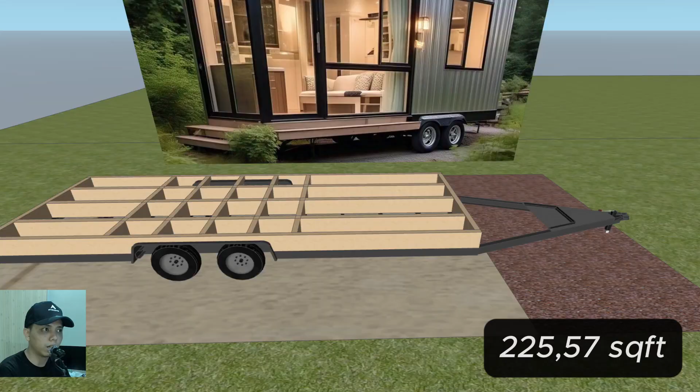Building a sustainable tiny home on wheels requires careful planning, material selection, and design consideration. Here are some brilliant tips to help you build a sustainable 225.57 square feet tiny home on wheels.

The first aspect is about materials and design. The first point is to use reclaimed or recycled materials. Incorporate reclaimed wood, recycled metal, and repurposed materials to reduce waste.

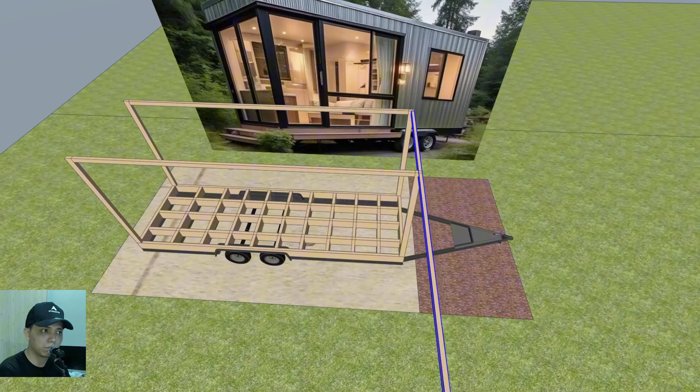The second point is to choose sustainable insulation. Opt for eco-friendly insulation materials like wool, recycled denim, or spray foam.

The third point is to select low VOC paints and finishes. Use low volatile organic compound paints and finishes to improve indoor air quality.

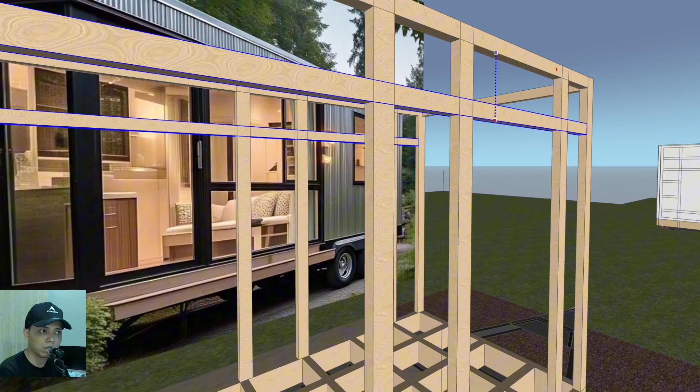The fourth point is to design for natural light. You have to maximize natural light with large windows, skylights, and clerestory windows.

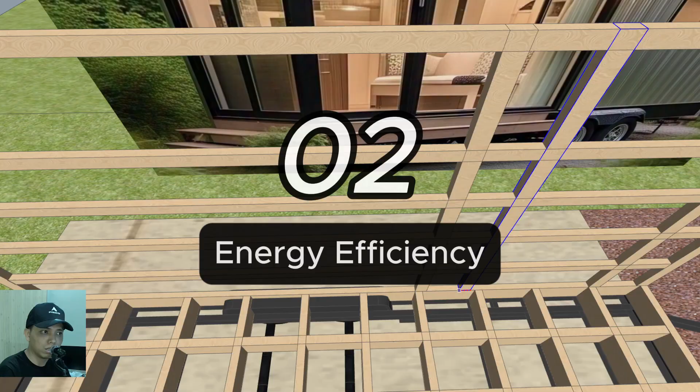Next is the energy efficiency aspect. The first point is about solar power. You have to install solar panels to generate electricity and reduce reliance on the grid.

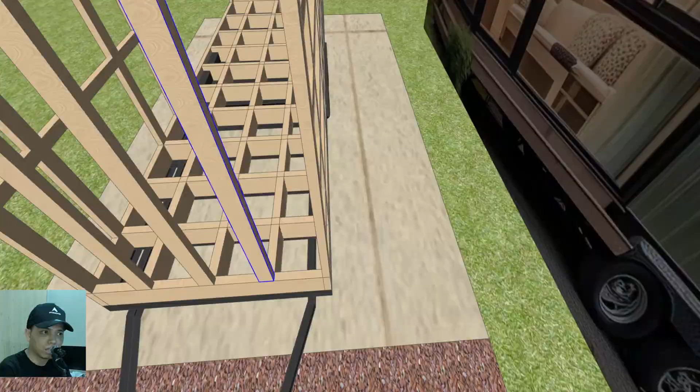The second point about energy efficiency is energy efficient appliances. Choose energy efficient appliances such as LED lighting to minimize energy consumption.

The third point is to insulate and seal. Ensure proper insulation and sealing to prevent heat loss and reduce energy bills.

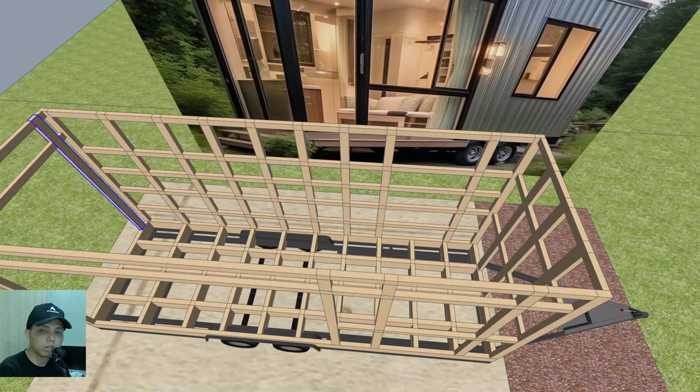The fourth point is about rainwater harvesting. Install a rainwater harvesting system to collect and store rainwater for non-potable uses.

For the water conservation aspect, there are three points. The first is low flow fixtures. Install low flow shower heads, toilets, and sinks to conserve water.

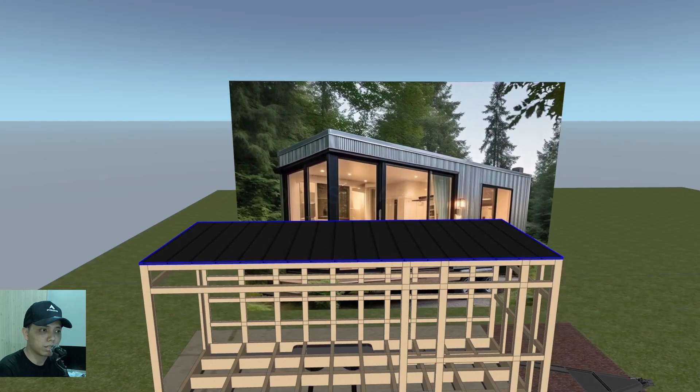The second point is about a gray water system. You have to implement a gray water system to reuse water from sinks, showers, and washing machines.

The third point is about a composting toilet. Consider a composting toilet to reduce water consumption and produce nutrient-rich compost.

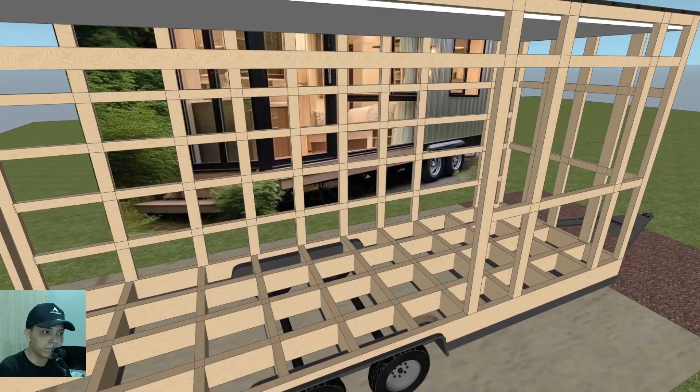For the waste management aspect, there are three points. The first is composting. Implement a composting system to manage food waste and reduce landfill waste.

The second point is recycling. Incorporate recycling bins and participate in local recycling programs.

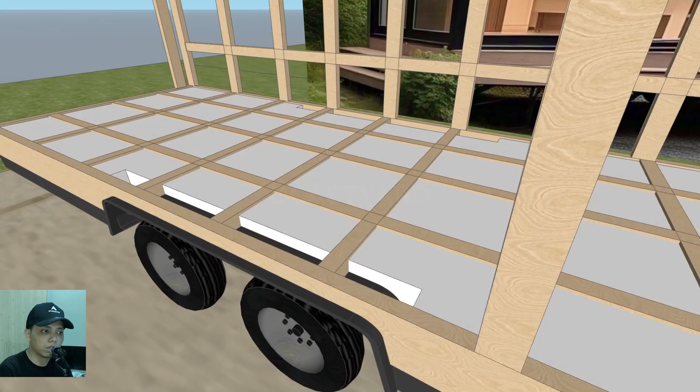The third point is to minimize waste. Design your tiny home to minimize waste generation by using materials and products with minimal packaging.

There are also three additional tips. The first is to use locally sourced materials. Choose materials sourced locally to reduce transportation emissions.

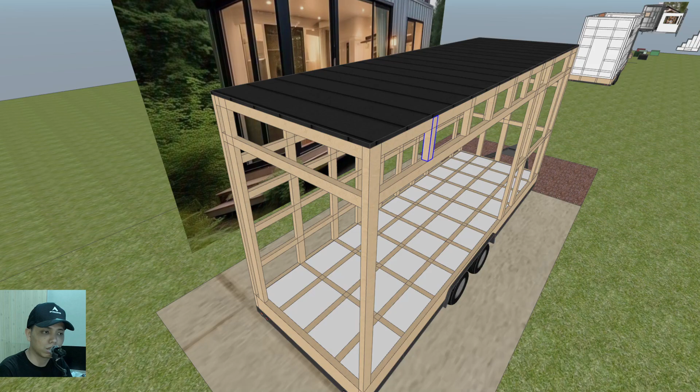The second additional tip is to incorporate plants. Add plants and greenery to improve air quality, reduce stress, and enhance aesthetics.

The third point is to monitor and adjust. Continuously monitor your energy and water consumption, making adjustments as needed to optimize sustainability.

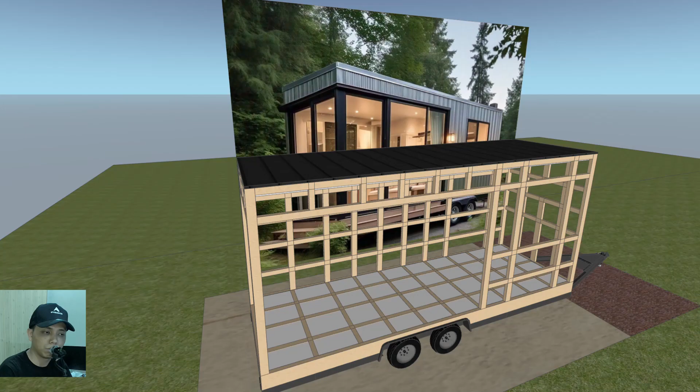For the budget breakdown, it includes materials, labor, solar panels, rainwater harvesting, and gray water systems. Materials account for around 50 to 60% of the total budget, and labor is around 20 to 30% of the total budget.

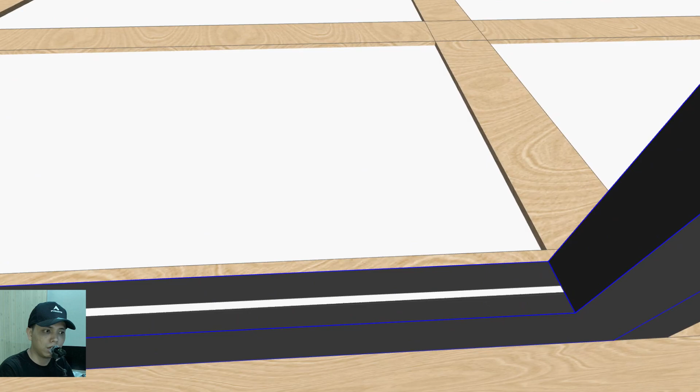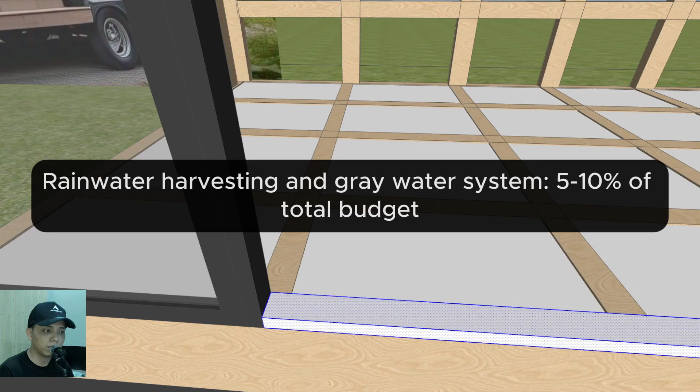Solar panels and energy efficient appliances make up around 10 to 20% of the total budget, while rainwater harvesting and gray water systems account for around 5 to 10% of the total budget.

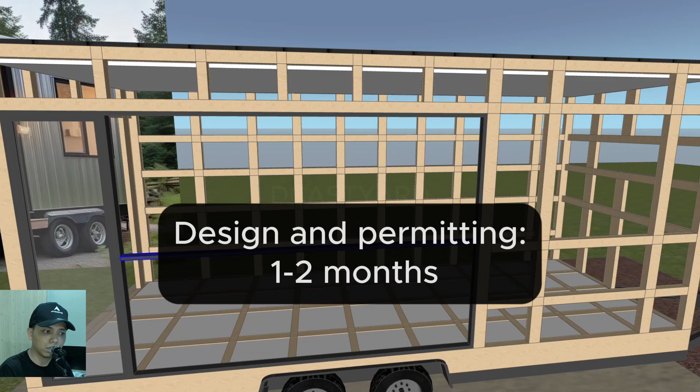For the timeline, it includes research and planning, which takes 2 to 3 months, design and permitting, which takes around 1 to 2 months, construction, which takes 6 to 9 months, and completion and move-in, which takes 1 to 2 months.

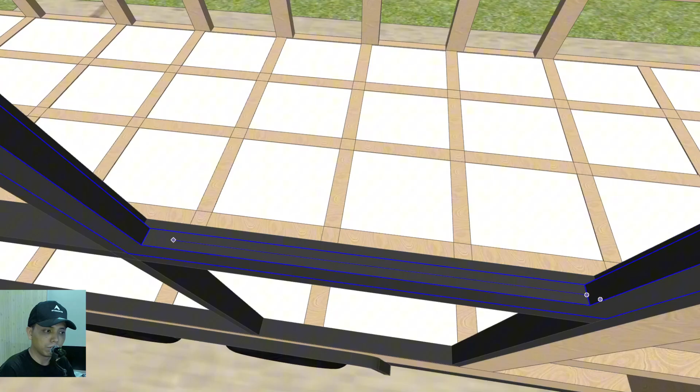By incorporating these sustainable design principles, materials, and systems, you can create an eco-friendly tiny home on wheels that not only reduces your environmental footprint but also provides a healthy and comfortable living space.